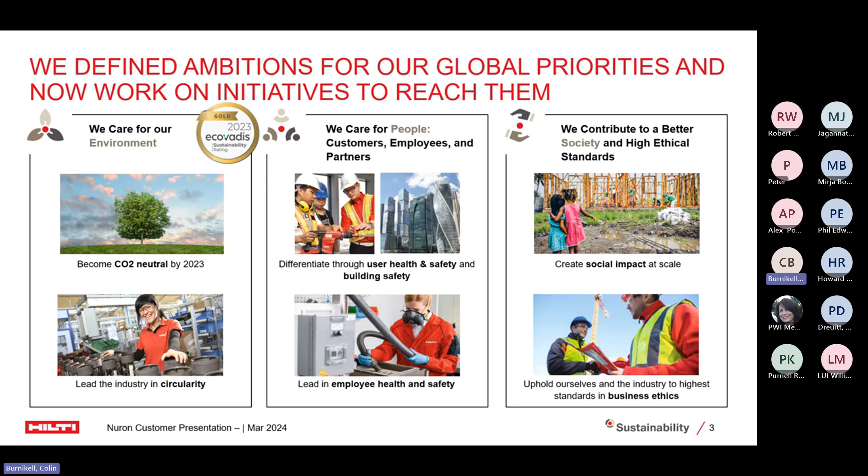But we don't just turn up with a table with a few bits and pieces on it. We like to demonstrate, or better still, get the client on the end of the tool to try it, to see how easy it is themselves.

Now, I can tell you how great Hilti are, but what about some referrals from within the industry? So every summer, COVID excepted, there's a 2-day event in Stratford upon Avon called Rail Live. And historically, this was based on big road rail equipment. But over the last 10 years or so, it's evolved to include all plant, including hand tools, the sort of stuff we would get involved with. And over that last 10-year period, I'm pleased to say that Hilti has twice been awarded the Plant Safety Champion Award. So as great as that is, when you think of all the suppliers that Network Rail deals with, to identify Hilti as their plant safety champion, that's quite some accolade.

However, doing a deep dive, why did we get it? Well, one was our innovative approach to problem solving, and again, you'll see some examples of that shortly. But also, the vast majority of the tooling that we supply the industry is cordless, not necessarily battery, but certainly cordless, which obviously negates the requirement of generators, spill kits, jerry can of fuel, and of course the tripping hazards of trailing leads.

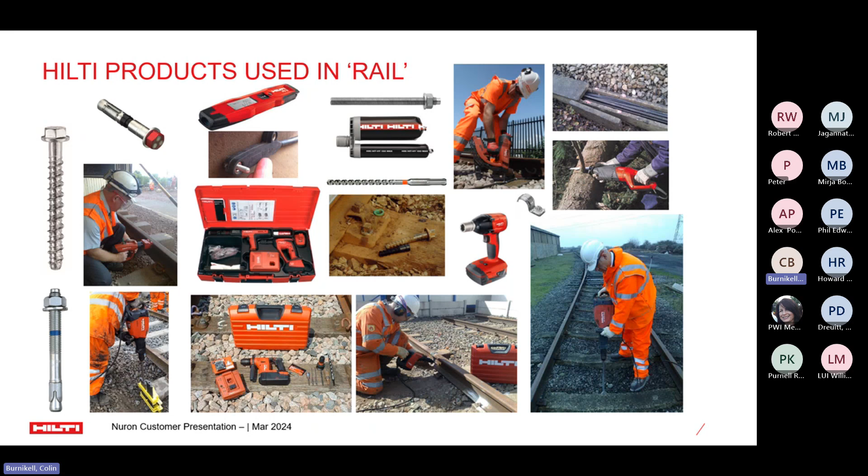So the type of products we supply the rail industry are wide and varied. But any of you on social media would have seen probably about 15 months ago there was a product launch where we introduced the Nuron range, a completely new cordless battery platform that superseded anything else we previously had. Now, the next slide, if everything works correctly, is a short video. There's no dialogue, just a little bit of music, but hopefully you'll get a flavour of what the Hilti cordless Nuron range is all about.

So there you go. That's the Hilti Nuron range.

So there you go, that's the Hilti Nuron range. I know not all those applications are railway related, but it just gives you an overview. I mentioned earlier about this investment in R&D, 50, 60 new products. Well, when we launched Nuron, there was 70 tools on their own in that launch, back in October '22.

So it is one platform. There's 5 different batteries, all with the same connections that can be used on all those tools. The idea is you don't have to mix and match with different manufacturers, one platform does it all. It is just a 22 volt, and for any of you that remember, we used to have a 36 volt platform, that's now been superseded by this. And although it's a 22 volt, it actually gives you a better runtime because of the advances in technology.

Top right, performance, again picking up on that technology piece. We now have the power, in some cases, twice the power of our competitors. So that gives you a longer runtime and gives you all the benefits of perhaps taking less kit out with you. The bottom left, the intelligence and connectivity.

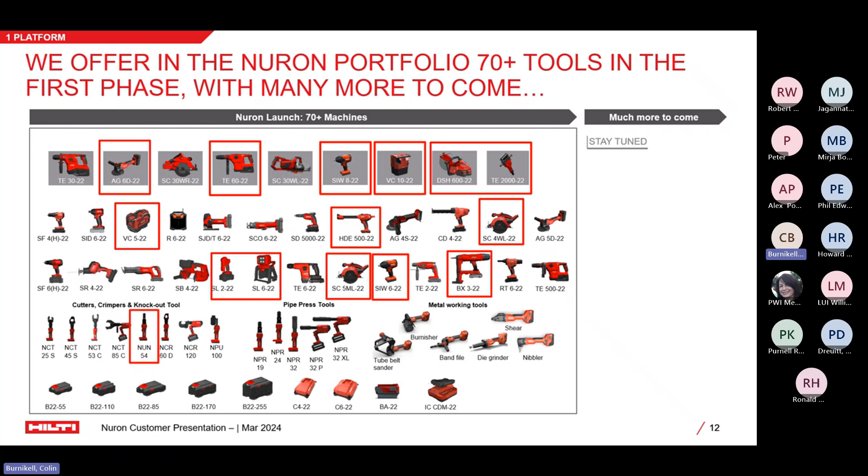In October '22, we had 70 tools. As of today, we now have 120 tools on that platform. I've got another product launch later this month, with another dozen or so tools coming out. The range is expanding, not just the numbers but the type of tools - we now have tower lights, concrete vibrators and mixers. Stuff that wouldn't normally be in the portfolio has been added, and it all uses the same battery platform. So stay tuned.

Here's an indication on those battery platforms. On the left, in the dark grey columns, you've got the old 22 volt Hilti platform and the old Hilti 36 volt platform. With the Nuron 22 volt platform, it clearly outperforms, even though it's less voltage. For the bigger tools, like the cut-off saw and the breaker, they use 2 batteries and you get twice the output. For a cut-off saw, the battery equivalent is slightly lighter, and runtime-wise, with 2 batteries in it and 2 as backup, is comparable to a tank of fuel.

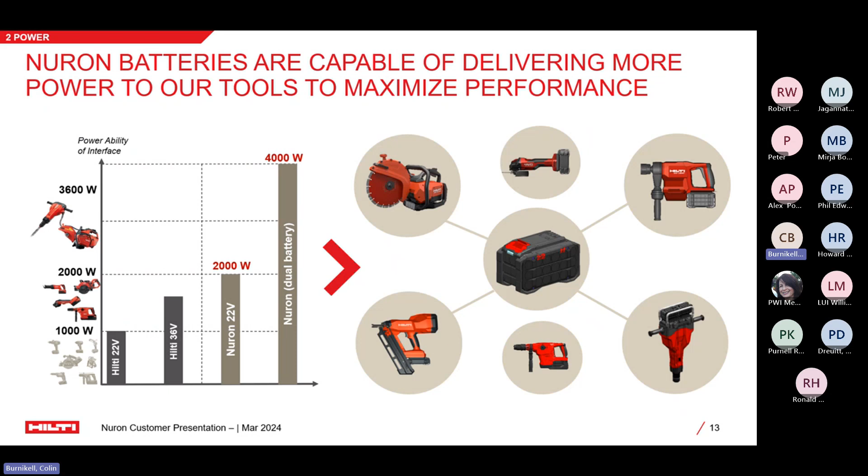On the intelligence and connectivity, or data-driven details, as I alluded to earlier, when you charge the battery, information goes up to the cloud. That can give you all sorts of information should you need it - the last 10 tools the battery was used on, and a last charged location, although not down to a millimetre, more within a few metres or so.

We also have battery health monitoring. There are two ways of doing this. One, you can do diagnostics yourself - press the button on the battery and it does a self-diagnostic. It runs for about 15 seconds and gives a traffic light, red or green. If it's green, the battery's fine. If it's red and the battery is less than 2 years old, reach out to my colleagues in customer services, quote the serial number, and they'll organise a replacement free of charge.

Now, if you go for our fleet option, this lease deal I mentioned, we'll proactively reach out to you. When your batteries are being charged, if we see they're dropping below a performance level we'd expect, we will proactively reach out and say, Mr Customer, battery serial number 12345 isn't running at its optimum. We'd like to collect that, remove it from your database, and supply you a new one free of charge.

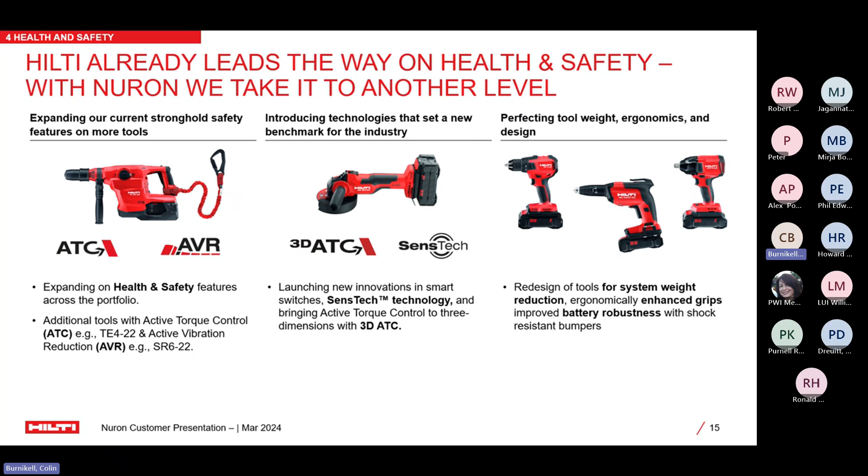So that's some clever stuff with the grinders. On the right, the tools are well balanced and very ergonomic, and as we said before, all the batteries fit on all of the tools. The last piece is dust extraction, which leads on to something in a second.

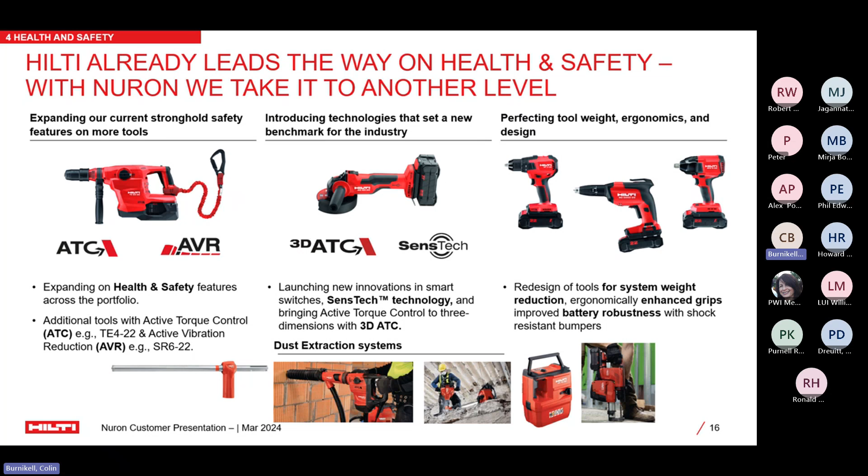On the far left hand side, although it may not look like it, that's actually a drill bit. It has a standard industry connection end on the right and a Hilti cutting edge on the left, but there's no helix - this is a hollow drill bit. The red shroud coming off it lets you plug in a hose to your battery vacuum cleaner, and as you drill into brickwork or concrete, the dust is sucked through the middle of the drill bit, through the hose, into the vacuum cleaner for you to dispose of later.

What about if you've got water ingress above where you're working? Clearly the hollow drill bit will potentially clog and not be suitable. So the middle image shows the drill with a rubber elephant's nose, as it's known in the trade, that simply concertinas up. You have a traditional helix drill bit, and the hose goes away again to your vacuum cleaner, but as you drill, it's not dust that's taken away - it may be a slurry or paste that's taken away.

The next one along is the breaker, which was in the video - our 20 kilo breaker with sub 4 meters per second squared vibration and the ability to operate dustless. And on the far right along the bottom is our TE6 with the dust extraction that won the award, which I mentioned on one of my previous slides.

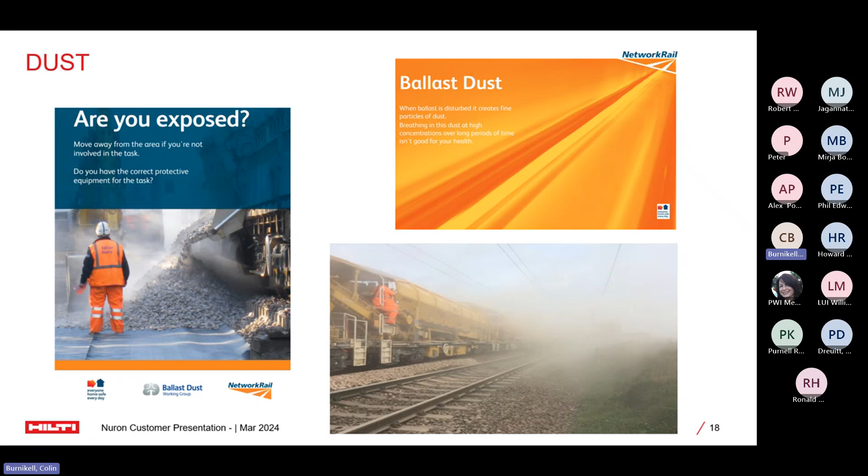But let's look at some applications specifically within a rail environment, where Hilti have come up with a solution partnering with the industry. So dust - when we talk about dust within the industry, it's normally ballast dust, but that's not what I'm referring to. I'm talking about the dust created when you're drilling, breaking, cutting, coring, etc. For those who saw the flyer I circulated, you'll know dust is a bad thing. It doesn't matter if you have the appropriate PPE on, if it finds its way into your ears or your hair. If you can stop it at source, that's by far the best solution.

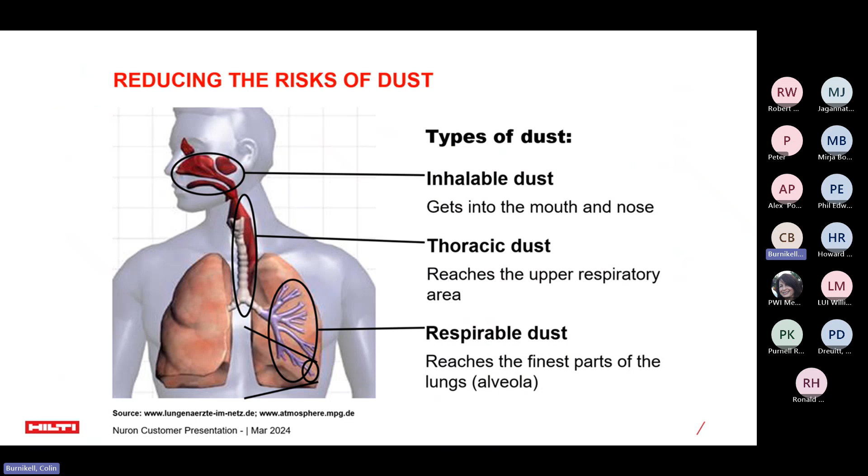What are the benefits? Well, clearly from a health and safety point of view for the operative, he's in a far better place. Interesting to note, the tools remain or become more efficient because the vents aren't getting clogged up with dust, and the consumables become more efficient because you're taking the dust away, whether you're drilling, chiseling, cutting, grinding, etc. That enables you to do the task even quicker.

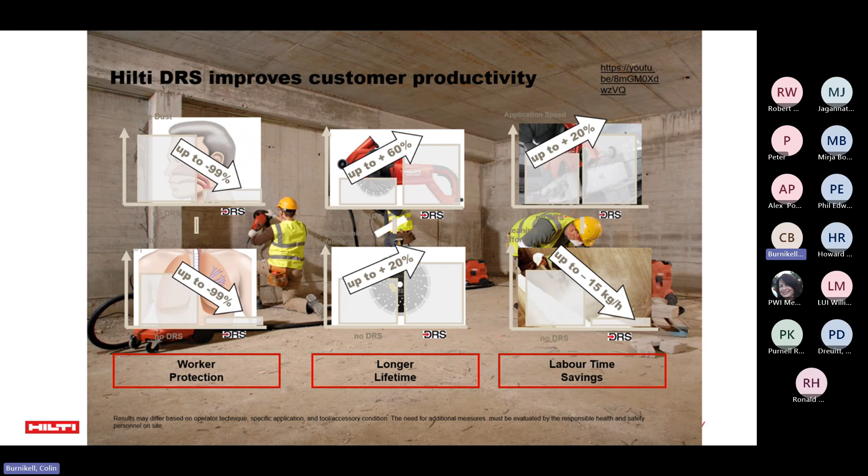So it gives you the full suite. It gives you health and safety benefits to the operative. And don't forget, it's not just the operative, it's the staff who are working around him. It enables you to do the task safer and quicker, and therefore providing productivity gains.

And that led into the slide that I used for the flyer for today's meeting. So that's myself with the battery vacuum cleaner attached to a backpack, so you can literally wear it on your back. Instead of dragging a vacuum cleaner along on wheels, bouncing along the track or whatever it is, you can wear it. And then you have the hose going into the hollow drill bit.

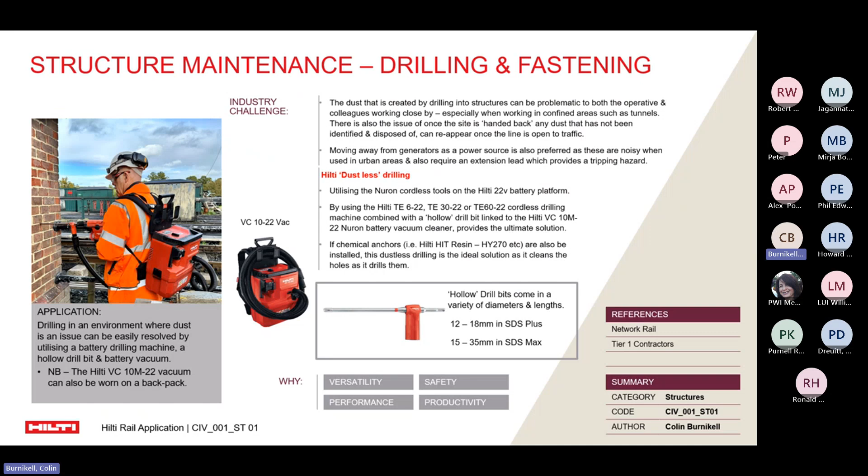And then I have a battery drill with a battery vacuum cleaner, so I'm completely portable. I can do that task anywhere. The hollow drill bits come in a variety of diameters and lengths, and we do the more common SDS Plus and SDS Max connection ends.

Let's have a look at some other applications where we've become involved and come up with a solution. So, Pandrol clip removal - we're talking about 401s predominantly, and you often see people removing these with a keying hammer, rightly or wrongly.

And when they're under tension, when they come out, they're a bit like a missile. They can fly. The recourse of that is obviously colleagues working in and around you can be struck on the leg, or this poor chap got struck on the face. It's not good, so you're looking for a controlled solution.

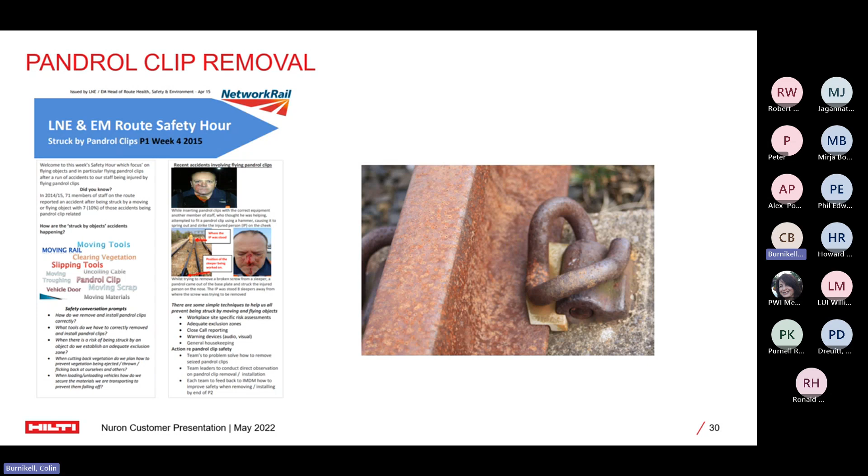So the Network Rail health and safety guys approached me and said, come on Colin, what can we come up with? So this is the solution we have in our portfolio - it's the Hilti TE 1000, and we developed an insert which hooks round the 401.

Now, I hasten to add at this point, it's not suitable for fast clip and it won't work on an e-clip. But for 401s, which are the most common, it literally hooks round the key and it eases it out - it doesn't fire it out. So let me just show you this.

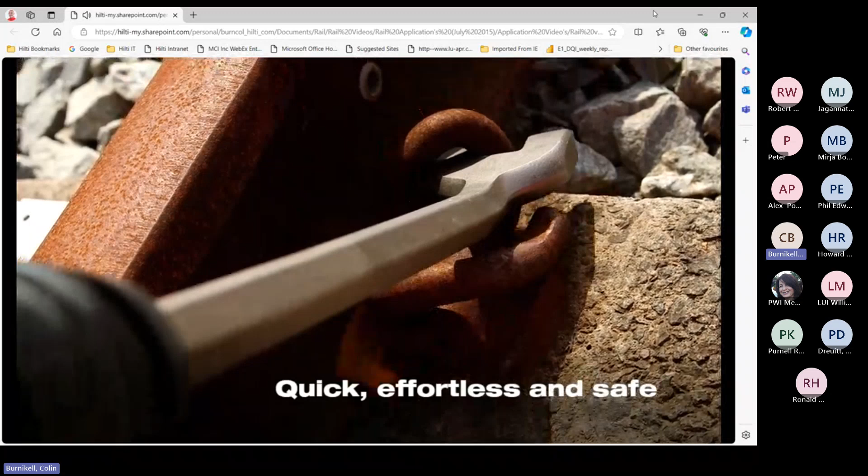So that's the Hilti TE 1000 being used to remove seized Pandrol clips. And we've done this on various locations - tunnels, bridges, level crossings - and it's certainly been a far more effective solution than big hammers, etc.

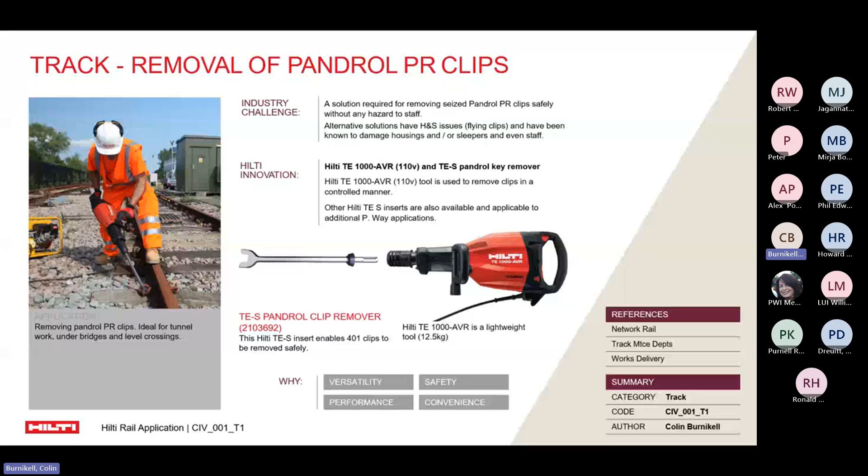But that's fine. What happens if the clip has broken and you need some sort of drift to remove it out of the housing so you can put a new clip in its place? So we've come up with that as well.

So I know the image is showing a complete clip, but if you can imagine that clip has been damaged and it's just the nugget, if you like, in the housing. We have this drift which fits in the same tool, and then all you do, you just ease the billet out, and then obviously you can then put your new clip back in.

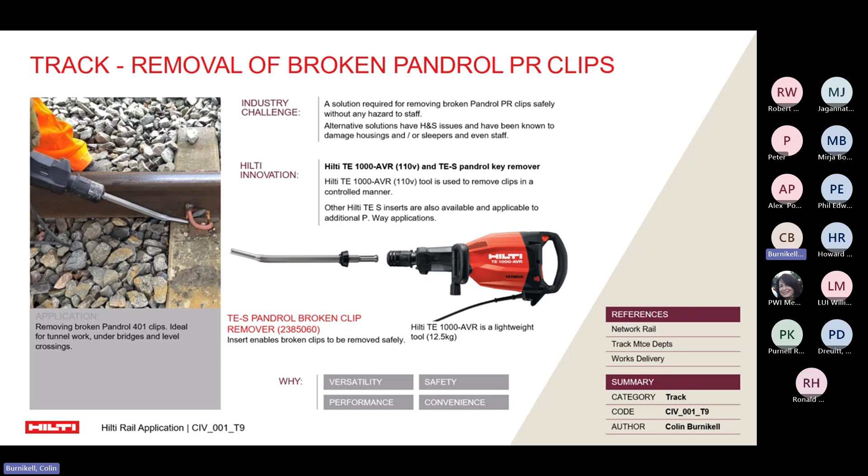I got approached by the Track Safety Alliance about an application for the installation of lateral end restraint plates, and they redeveloped the LERPs, and they wanted a solution for installing it on the sleeper ends and in the 4 foot. So they tried petrol tools that were probably overpowerful when I was bouncing all over the top. They tried big hammers, didn't want to be doing that.

So they reached out to me because the T1000 is Network Rail approved. Can we come up with a special chisel that would mirror the shape of the insert on the top of that blade?

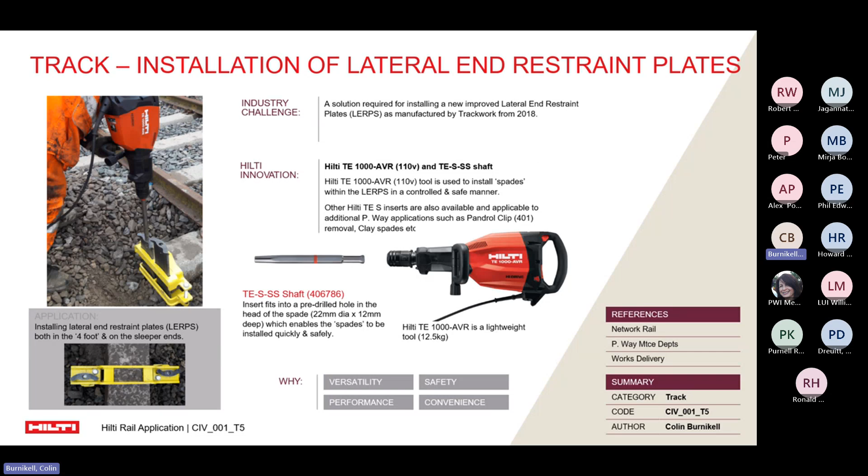So we got together, we had a look at the application, and I said, well, if we have to develop from a standing start a new chisel to support this particular application, there's going to be manufacturing costs and manufacturing times. Why not drill a 22mm hole, 12mm deep, in the head of the blade, and then our standard TE-S shaft will fit straight into that, and you literally just drive it straight down into the track. So you still need to dig it out, but you're using off-the-shelf proprietary items, and that's what they've been doing.

You remember the T2000, what we spoke about earlier on the video, the new battery Nuron tool? Well, it can also be used for installing the LERPs. Same application, obviously cordless, no generators, no trailing leads. It's got more power, more punch, if you will, so it enables you to do the task even quicker.

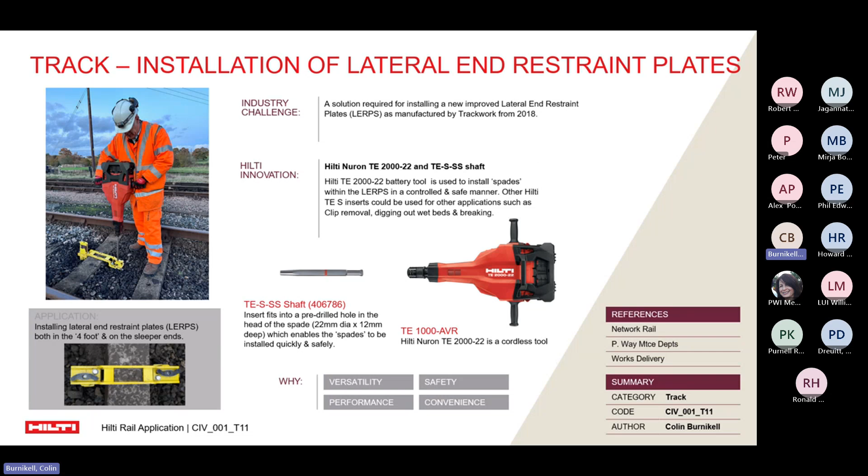And whilst we're talking about PWI and innovation, I'll just share this with you. So cutting rail - I'm not talking flame cutting, I'm talking about cutting rail using a traditional petrol saw. First off, we don't have a saw for cutting rail. News alert, not yet, we're working on it. But what we do have is a traditional carborundum disc, which is very much similar to the standard blades on the market. You'll get 1 or 2 cuts, then that's it.

But we also have a 14-inch diamond blade specifically designed for cutting metal. And the advantages of this are clear. Multiple cuts - it doesn't matter if it's out there and raining, the blade will still perform. Doesn't matter if it gets wet. If you hit a bit of ballast, it's not going to shatter.

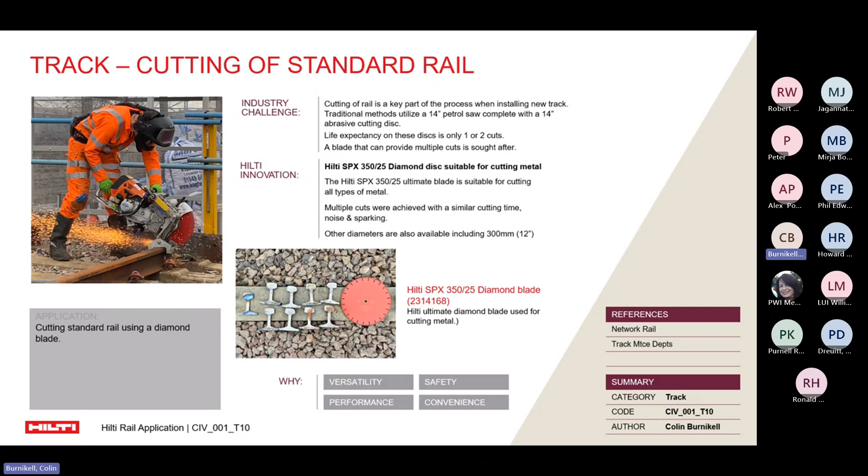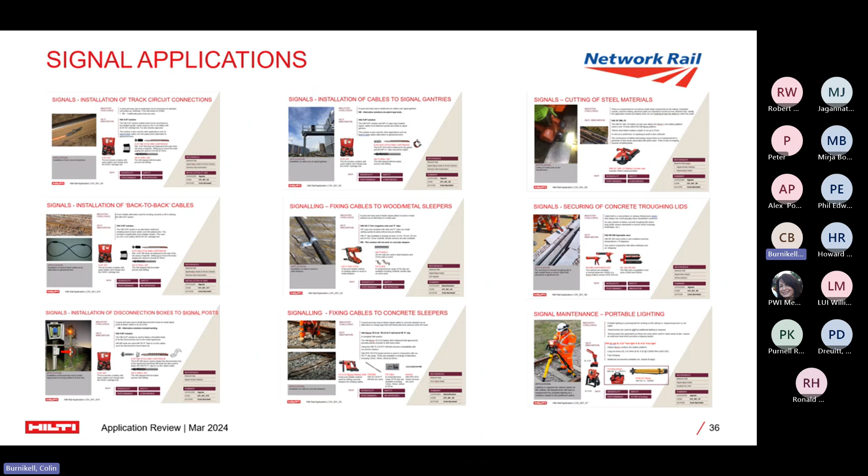Now, obviously, we're a broad church within the PWI, and it's not just about permanent way. So I wanted to share with you just 1 or 2 applications where we've been supporting the signalling fraternity, just to give you an idea of the innovation that we're bringing to the table.

So here is our solution to the track circuit application. Now, we were approached by the industry - Hilti is a recognised supplier for fixing and fastening solutions. How would you install a track circuit? So we said, well, how would you currently do it? Normally a petrol tool clamped over the top, etc. So we came up with this solution. Instead of me verbalizing it, let me just play this video and hopefully you'll see what I mean.

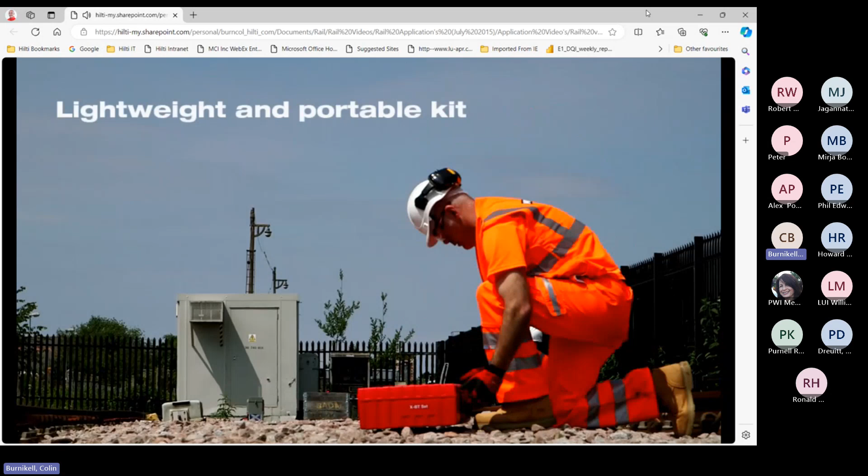So everything's supplied in one kit, in one box. You have a cartridge tool, a drill, a couple of batteries, a charger, and a recess for all the consumables.

So we do 3 different jigs for the most popular rail profiles, and they're magnetic, so they simply sit in the web of the rail. Now what we're going to do is mark the 2 holes in the rail at the correctly spaced 76mm centres.

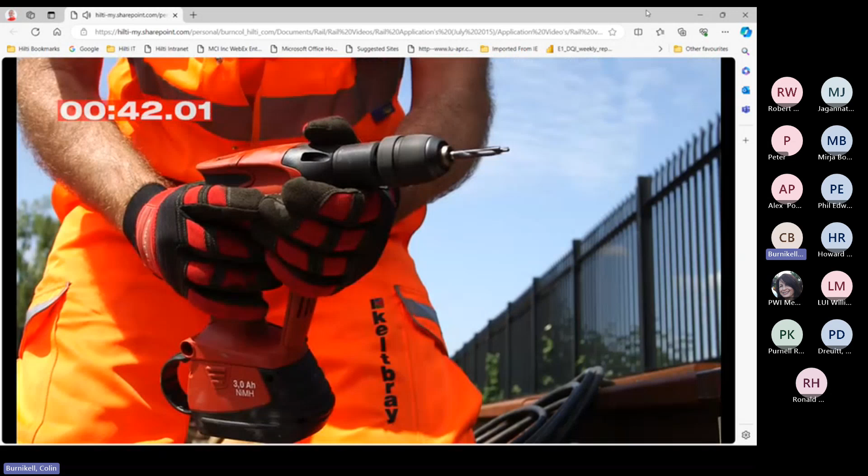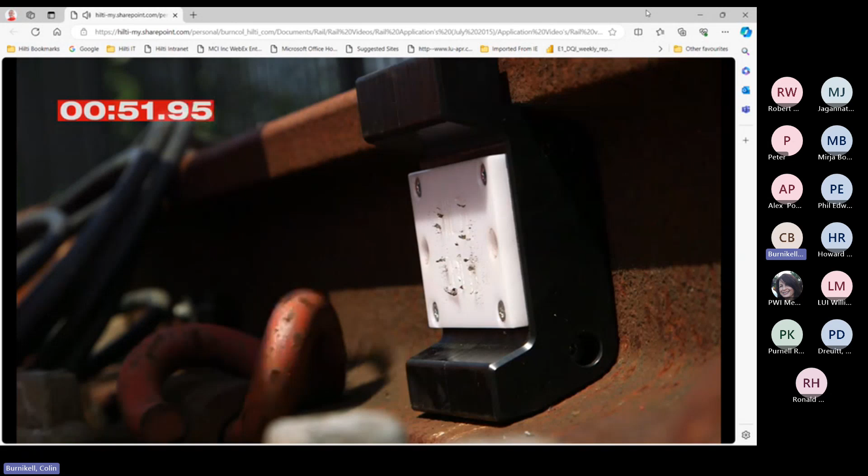So there we've marked the 2 holes. We're now going to go back and finish drilling. It's a shoulder drill bit, so you're not drilling all the way through the rail, we're just drilling 7mm deep, 4.2 diameter. So the drilling time using a battery tool can obviously be done very, very quickly.

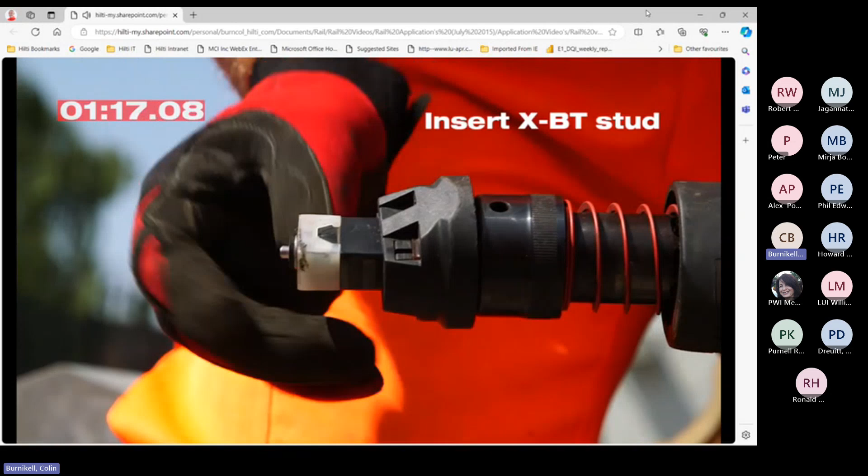And then we have a cartridge tool. By definition, the power source is a strip of cartridges, and we have a threaded stud - in this case an M6 - that sits in the front, but notice it sticks out. And then all we're going to do is line it up in the hole, pull the trigger, and the stud is an interference fit in that blank hole.

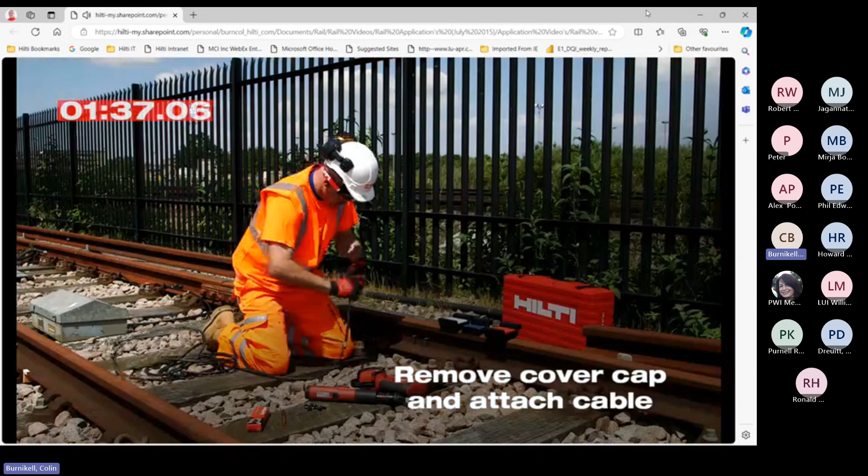We then remove the protective caps off the threaded stud to expose the M6 stainless rod, attach the track circuit, put your stay tight nuts and torque to 10Nm as you would. So it's quick, easy, portable, and industry approved.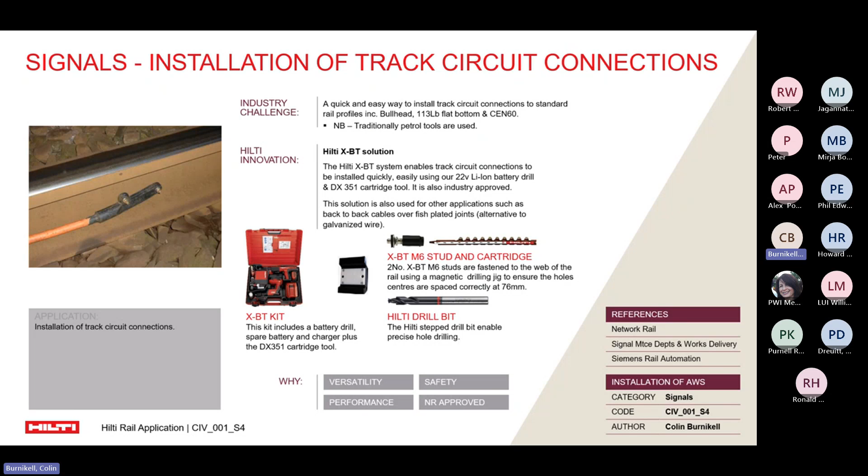Now what's interesting with that application, we've had that for some time, but both NR and the signalling contractors like Siemens, Atkins, etc., have become quite creative, using the same kit, the same tools, the same drill bits, same studs, as an alternative to a galvanised wire on a fish-plated joint. We don't make the back-to-back cable, but it's the same manufacturer that makes the track circuit, so it has the same hole geometry, which enables us to use the same stud. This will give you far better reliability as opposed to a galvanized wire.

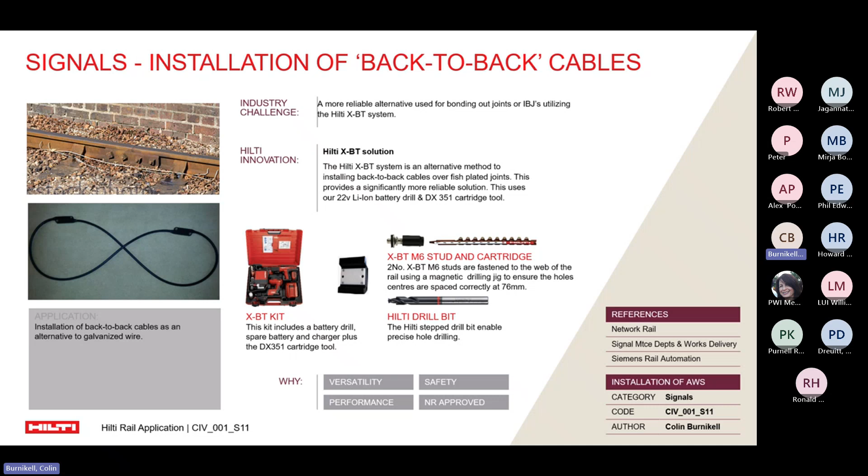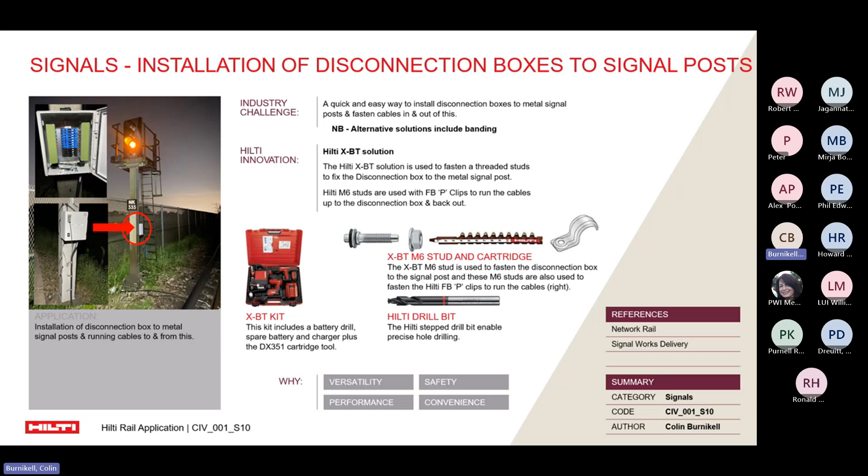Disconnection boxes. So when these are fastened to a steel signal post, what the guys and girls have been doing is putting one stud at the back of the disconnection box. You've got a hole at the 6 o'clock and the 12 o'clock positions, so they put one stud on each, with nut and washer, then run a cable away from the disconnection box and another cable up to it. They use another M6 stud and one of our P-clips just to hold the clip in place.

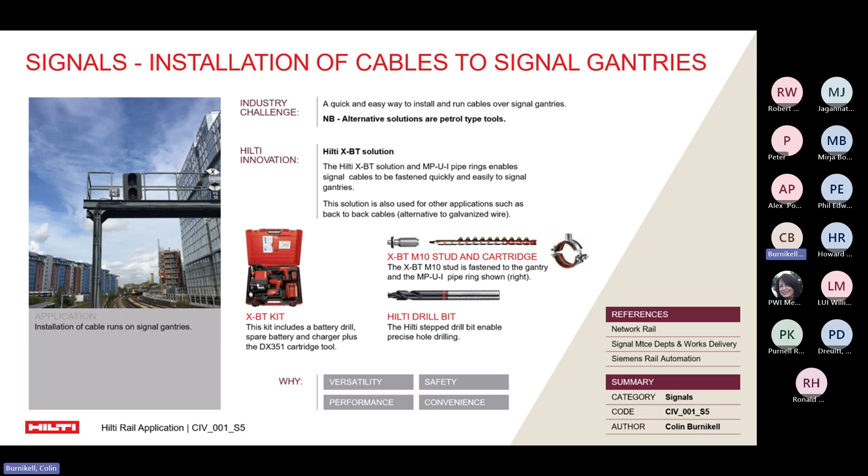And then the other one was running cables up a signal gantry. In this instance it's the same kit, the same drill bit, but we've gone for a bigger M10 stud, which enables us to use our clips with an M10 boss. You simply spin that on, attach the cable, and it gives you a nice, tidy, safe job.

The more traditional method for fixing cables to concrete sleepers is cleating. So we have the Nuron battery drill, which we spoke about earlier, NR approved. We have the 6mm drill bit, and the hammer screw and P-clip, industry standard. This has been done for some time.

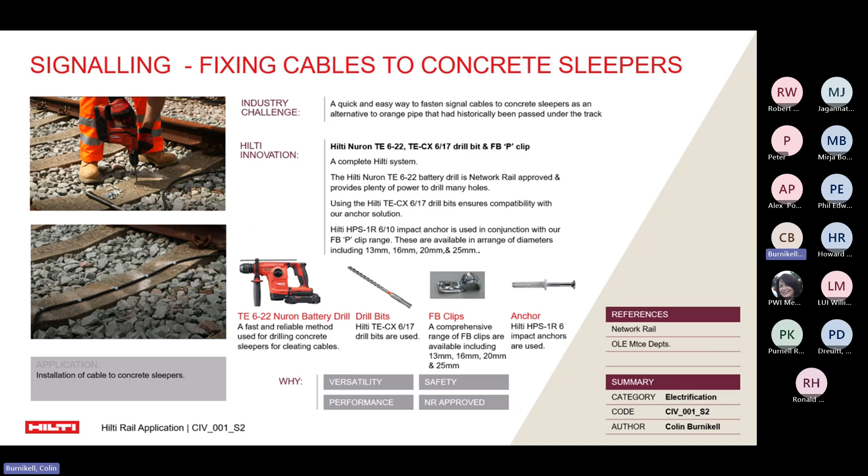But what about if you want to fasten to wood or steel sleepers? We have a network rail approved solution for this. I'll just run this video and you'll see how that works.

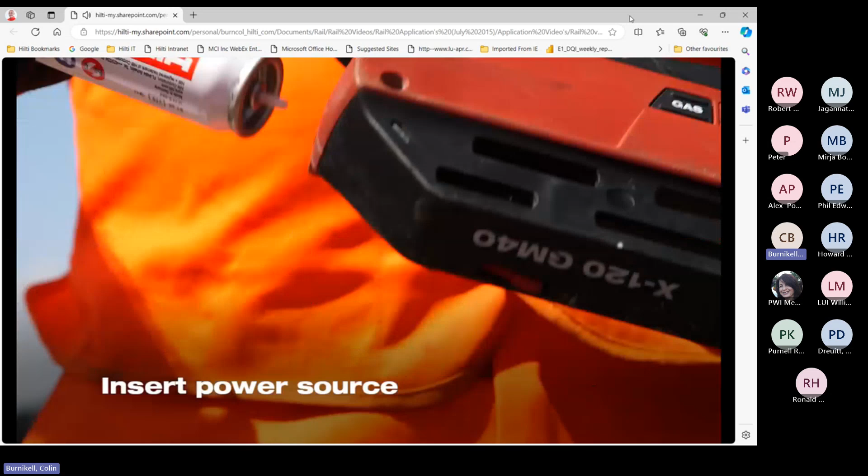So we have that track circuit installed, and now we're going to cleat, in this case, to a wooden sleeper. It could be a steel sleeper if it's north of the river, but the gas goes in as a power source. There's your gauge telling you how much gas you've got, and the nails go in the magazine. You can put up to 40 nails in, and one canister of gas will give you 1,250 fixings.

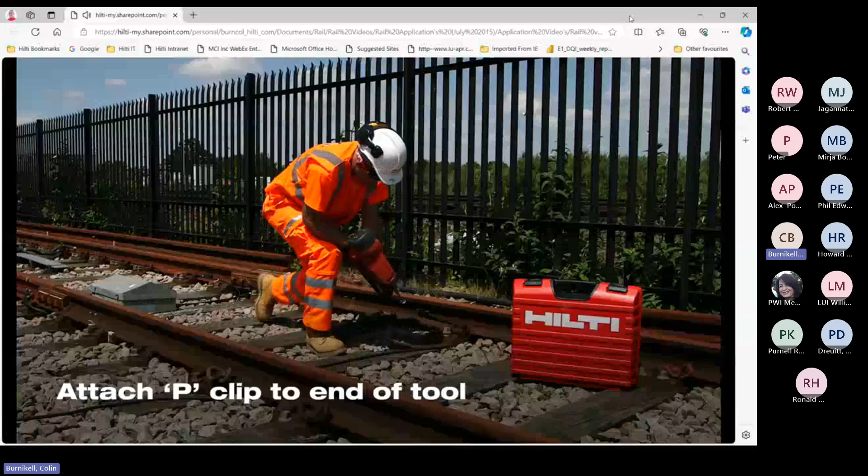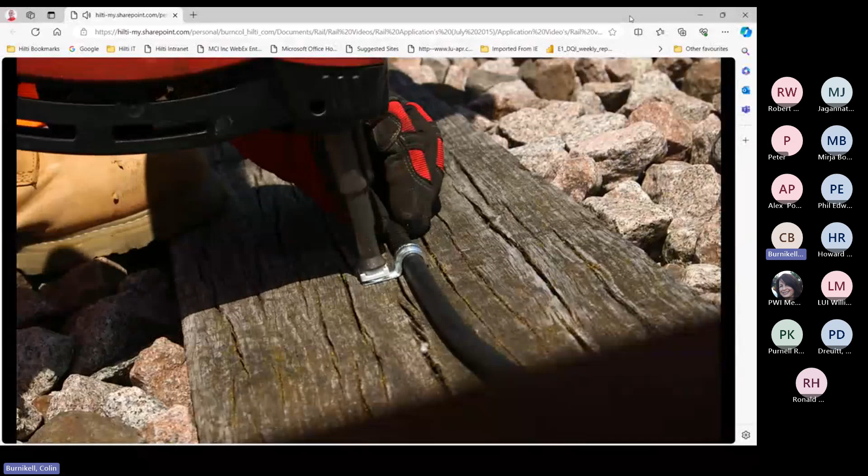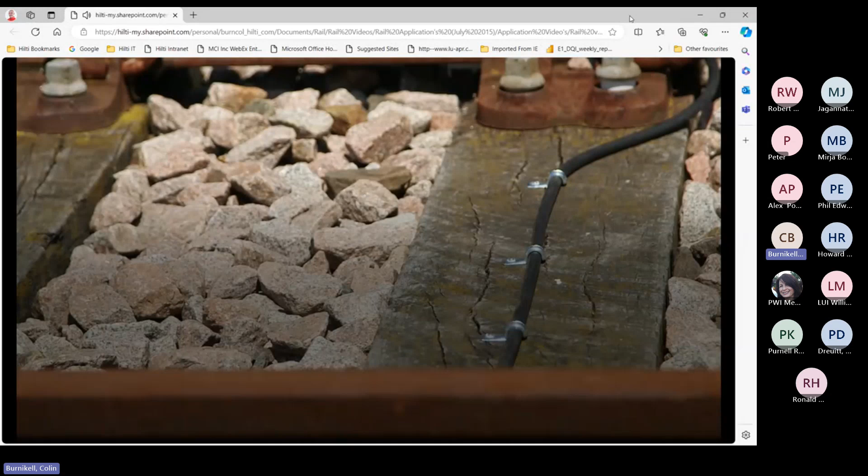P-clips come in different shapes and sizes, but notice that raised dimple - that enables it to attach to the front of the tool. You simply push down, pull the trigger, no drilling - it just fires the nail through the P-clip, in this case into your hardwood sleeper, but equally it would work on a steel sleeper. Nice, clean, tidy job. That solution would also work on GRP sleepers as well.

Just quickly running through some other signaling applications, the Hilti HSL anchor is the industry standard for fixing the AWS bolts, AWS magnets down. This has been upgraded - it's the same diameter, same length, gives you the same load performance, but the torque moment has been reduced, making it easier to set. In the bolt head there's a QR code, so if that AWS magnet was installed and there was an issue with one of the fixings, you could simply scan the bolt head with the Hilti app and it will tell you the part number, the batch number, the description, etc.

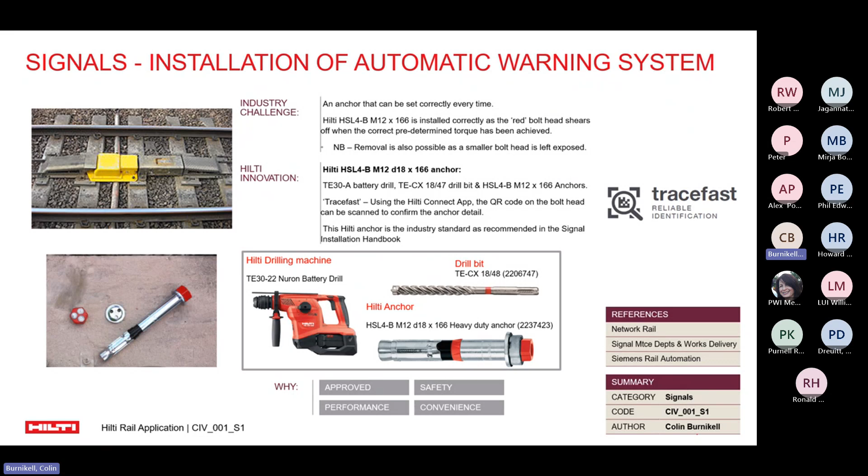Just quickly rattling through these last couple - cutting aluminum plate, channel rodding - we have a circular saw designed for cutting metal. Now normally circular saws, you're thinking kitchen work surfaces, etc., but this one is designed for cutting metal. It's also a cold cut, non-sparking, and capable of collecting the swarf as it cuts. Some very clever stuff there, and it's been well embraced by both maintenance and works delivery within Network Rail.

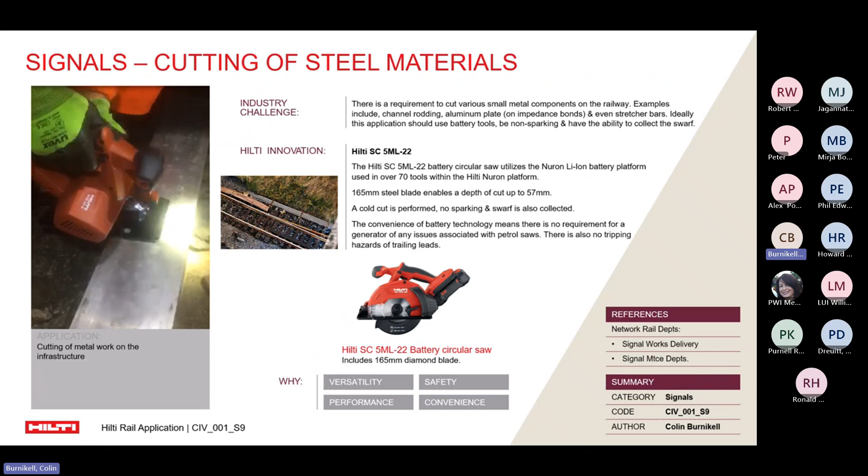And then cable theft is, or certainly was, a bit of an issue. We have a solution where our resin, historically used with our threaded rods, can be used as an adhesive. Literally you line the top of the concrete trough, and then embed the trough lid on top. Over time the resin cures - at 20 degrees it's about 9 hours to fully cure.

So where you have easy access, like level crossings, places where the public can easily get in, and these undesirables may be trying to take cable out, you could put maybe 10 or 12 troughs glued down. Beyond that they'll be open because obviously you need access from a maintenance point of view.

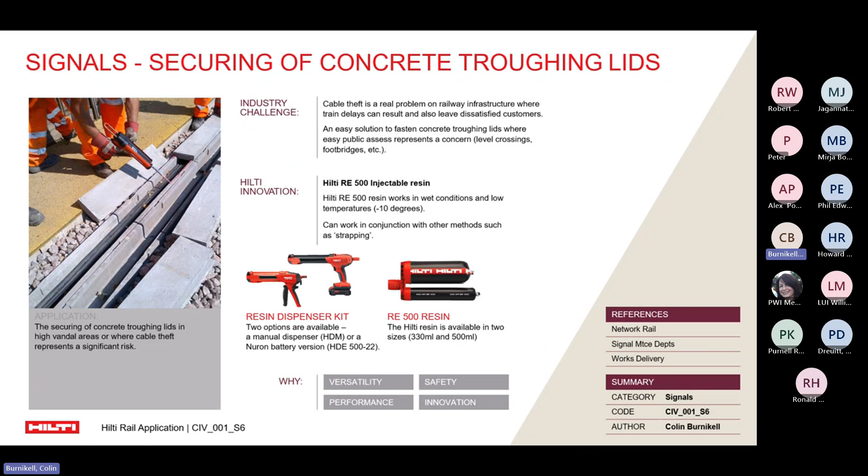On the lighting side of the Nuron platform, we also have lights to complement the head torch: a task light and an area light, and we've recently introduced a tower light. It goes up to 2.1 meters, is 6,500 lumens, with a runtime of about 4.5 hours.

The clever thing with that light is you can isolate either the left or the right side. So if I'm putting that light up to a tunnel wall and only want to illuminate one side of the track, by turning off the other half we avoid light pollution, and I double my battery life because I'm only using half the LEDs.

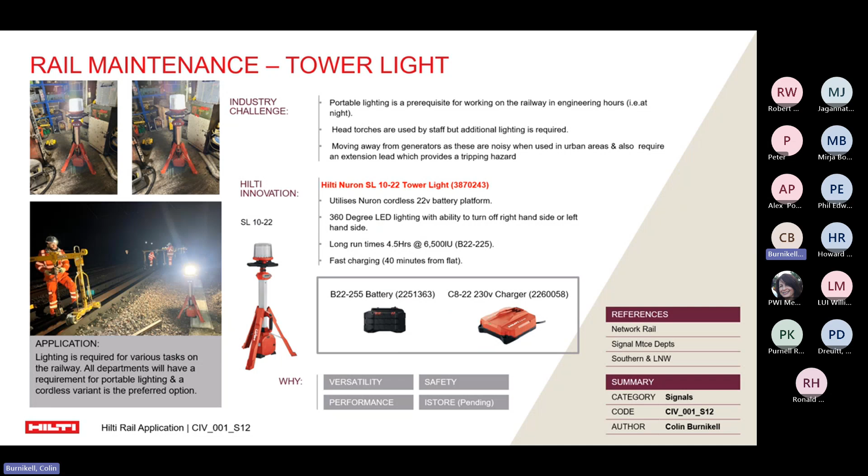So a glimpse into the future - this is new stuff that's coming, not yet available, but coming this year. This is a battery pack. There are a couple of bits of kit in our portfolio that are still 110 volt, and this battery pack would supersede a generator - no noise, no fumes, no rip cords, no spill kits.

It's a battery pack that weighs about 16 kilos. Run time depends on what you plug into it, of course, but charging time from flat is a couple of hours. For the welders who use our needle guns, that would be an ideal bit of kit, and it's maybe 25% of the size and weight.

We've also introduced, or will be introducing this year, an addition to our exoskeleton range. In this example, maybe a little difficult to make out, the chap drilling with that drilling machine has a link above the drill clipped onto the exoskeleton. So all he's doing is guiding the drill - the weight of it is on the exoskeleton.

So if you have heavy, big bits of kit that you're using in that sort of environment, you're not actually physically holding it, you're simply guiding it.

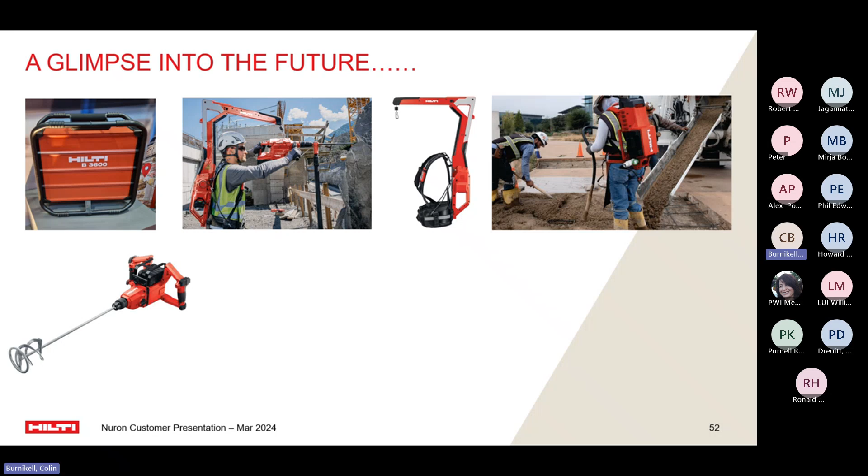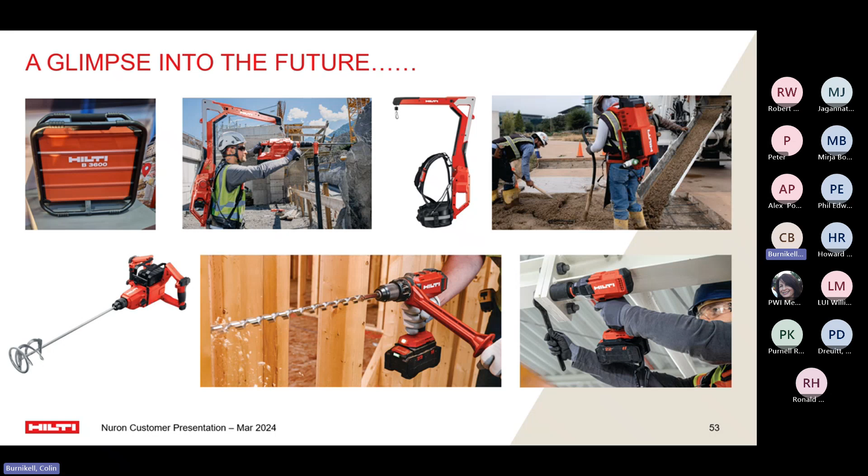We also have these concrete vibrators coming out this month - a backpack version and a smaller one. We also have a mixing paddle, for grout under base plates and that sort of thing, all on the Nuron platform. Then there's a drilling machine, ideal for hardwood sleepers, and an impact wrench coming in August with a 3/4 inch drive, ideal for things like fish plates. All this stuff is coming this year, and it's all Nuron battery operated kit.

So the final piece of my presentation is about our asset management solution. I want to take you on a journey into time. This has been endorsed by Network Rail as an ideal solution for them, and they've invested in this.

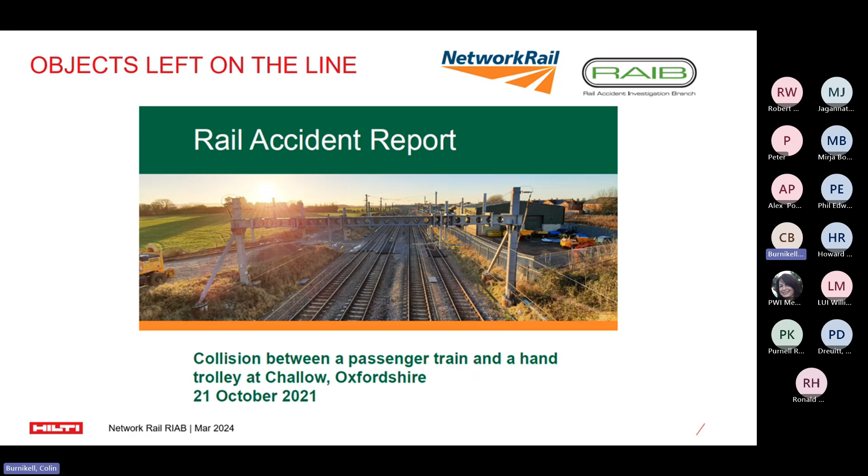Challow, Oxfordshire, October 2021. There was an incident at this location, and suffice to say, the Rail Accident Investigation Branch got involved. Quick geography check - where is it? Challow, Oxfordshire, not far from Didcot.

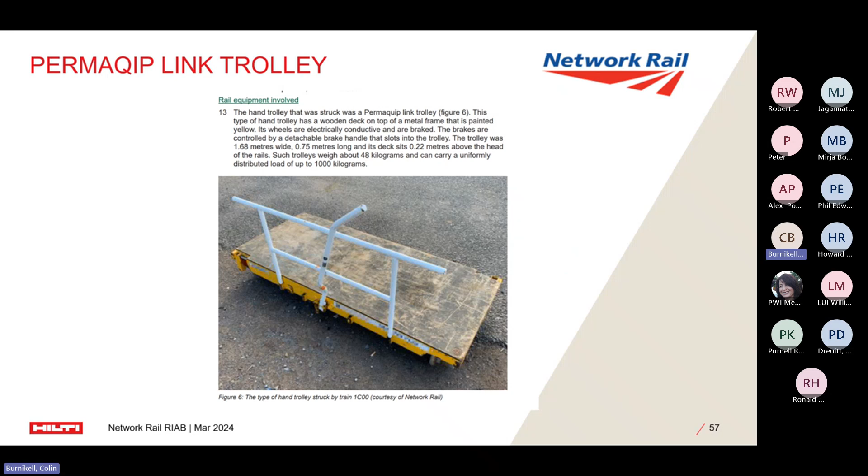Here is a link trolley. Why am I showing you a link trolley? Well, this is what the driver saw when he came down in his Azuma at 123 miles an hour - the link trolley was left on the track.

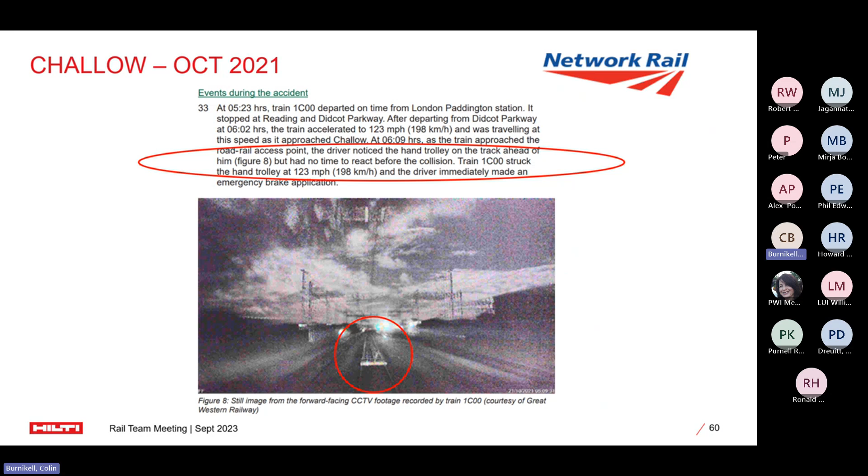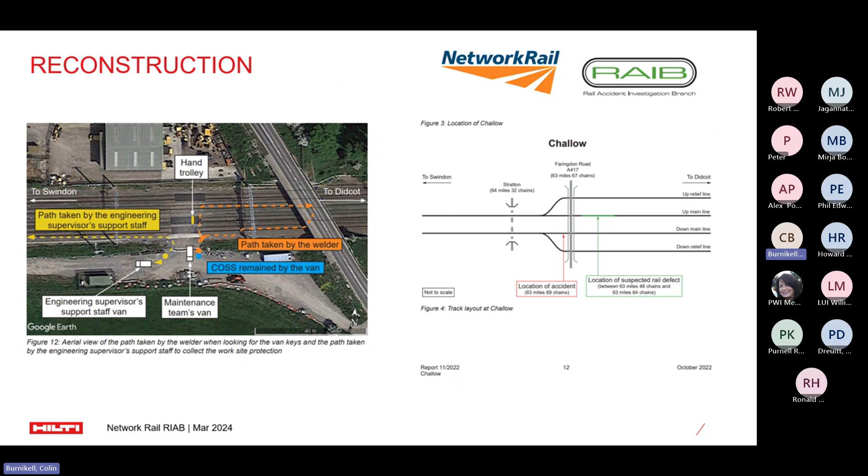The Rail Accident Investigation Branch got involved and decided to do a reconstruction. This is the access point - the vehicle backed up onto the track, and the next slide shows what they did as a reconstruction, offloading everything onto the trolley. The vehicle drove off, the trolley was pushed down to the job site. They then did the task, put everything back on the trolley, brought it back to the access point and loaded it all back. Their conclusion was it was pure and simple human error.

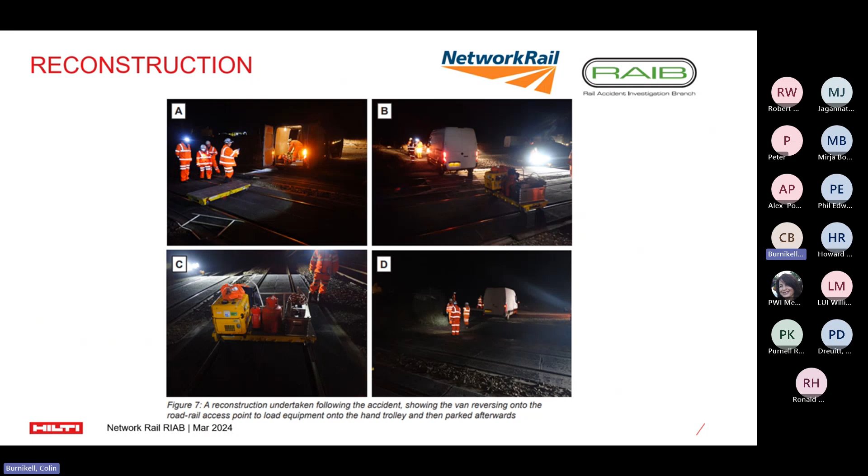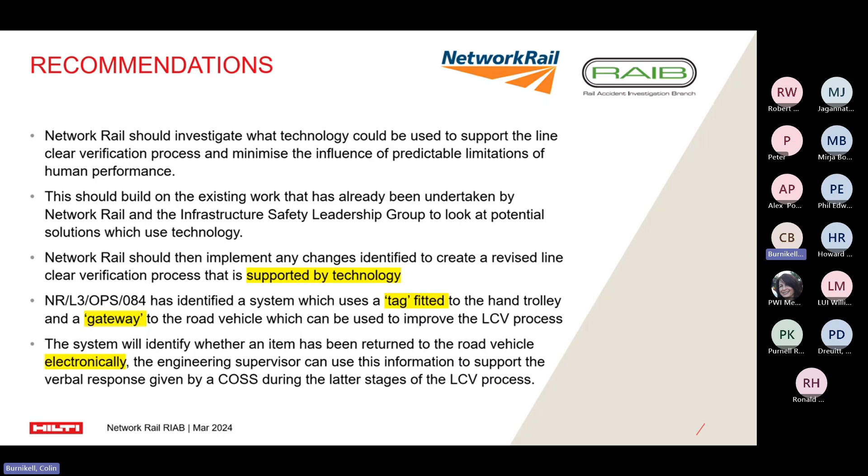However, they made some recommendations. Now, the first thing to point out is we're not going to get involved with the line clear verification process, but with the technology available out there with tags and gateways, this should be something Network Rail would embrace. So that leads on to the Hilti ON!Track asset management solution.

So you know Hilti for tools and fixings, but we also have a range of services, and here is one example of that.

With this system, what we have is an app for your mobile phone that works on all mobile phones, and we also have a desktop version - that's your software. On the hardware side, we have passive tags, like a QR code on an adhesive label that you simply attach to the asset. Now that becomes a manual process.

When I'm taking it out from the stores, I have to physically scan that tag, and then it says it's been taken from the stores. And then when I finish with it, I have to manually scan it back into the stores. With the greatest will in the world, although that was better than pen and paper, there were still some challenges with that.

So we introduced a Bluetooth tag. This tag would typically go either zip tied to an asset. Don't forget, this can be any asset - it doesn't have to be a Hilti tool. It can be an Ironman, link trolley, skate, point machine, whatever. This can be zip tied, or it's actually got a wire here that would hook round, and you would attach that to the asset.

Now here we have an inventory gateway. This will be sitting in the stores. So when the asset with this tag attached to it leaves the stores, it's automatically transferred out the stores. There's no paper to be filled out. It automatically does that. But of course, where has it gone?

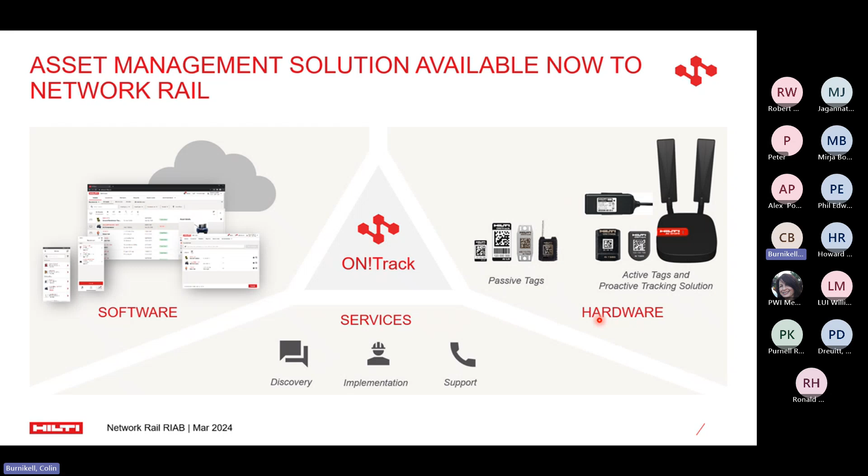So let's just show you this one. Said asset's in the stores, comes out of the stores, automatically booked into this van. The van drives to site. Now, there may be something they're going to transfer it into a store's location on site, or it might simply get used on site. So let's say it gets used on site.

Now, before they hand the track back, that scenario where we had the reconstruction, you simply run an inventory report. And what that will do, it will say, when we got to site, 10 assets come out with a Bluetooth tag on, and 10 have been returned to the vehicle, in which case you could send a copy of that report to the COSS, whoever needs it, saying, yeah, all fine.

But it might say 10 assets were removed, but only 9 returned. It will tell you this is the one that's missing. It will show you a library image of what the thing is that's missing, and because it's Bluetooth, it's sending a signal out. It will show you the last seen location, and it might be 15 minutes ago, and it's just down the track, past that embankment or whatever it is.

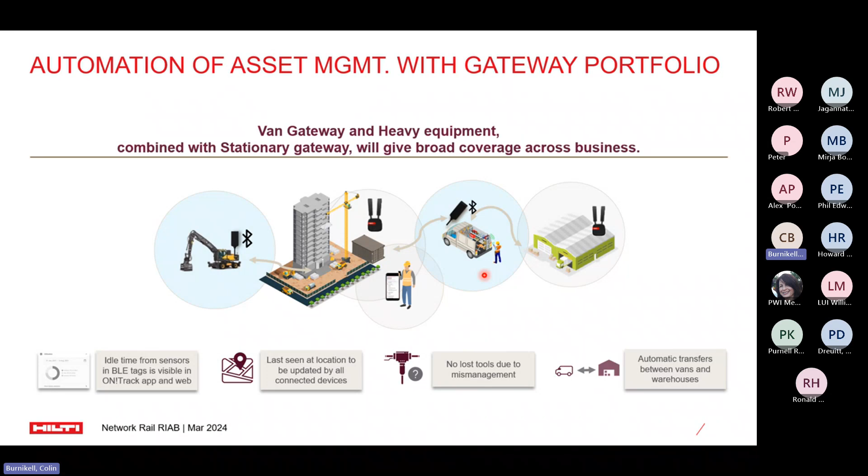So you've got a map. You can zoom in and you can see where it is, and then you can ask one of your colleagues, go and pick it up, bring it back to the van, and then we're clear. So it gives you this accountability, it gives you the visibility, and it gives you the transparency as well.

And then just as a kind of footnote to this, we've spoken about moving and managing assets. We can do inventory checks. So if you wanted every Monday morning at 7 a.m. to have an inventory check in the stores, it would auto run and send that report to whoever needs it.

If you want to create reports, how many repairs have we done in the last 3 months on petrol tools or whatever it is, we can create all these and set them up in the system. And we can also attach any documentation - it might be MOT, insurance, PTS, operators handbooks, whatever. These can be attached.

This thing about asset utilization we spoke about before, you've now got the hard facts in front of you. That set of tools hasn't moved in 6 months. There's the facts, there's the evidence. Let's off-hire it, we don't need it. So yes, it can be used for the assets on the line, but it can be used for a wide range of other things as well.

And just to give you some examples, this was the Network Rail plant location in Scotland. So within plant, it's road rail vehicles as well as hand tools. So what they done on these vehicles, they put our QR code on the driver's door. So before the driver got in the vehicle, he'd simply scan the code. It brings up a picture of the image, and it will give him all the additional information he might need. And if there's any certification, it won't just give the date, it will give you a copy, PDF, that you can open up if requested and produce.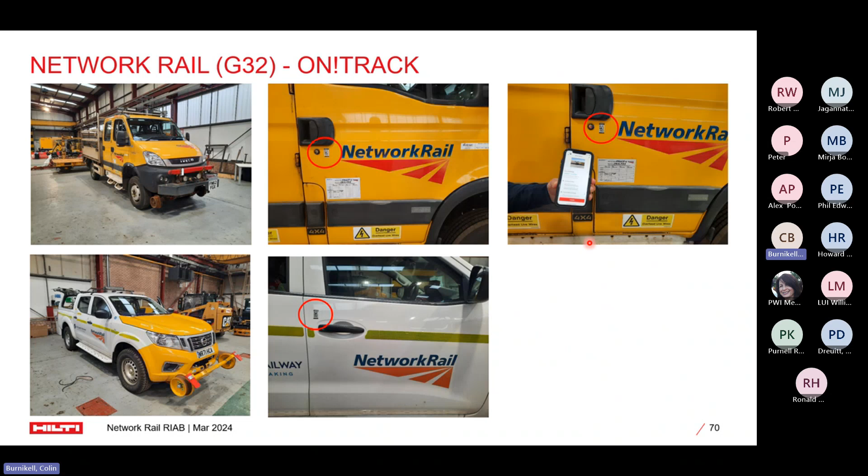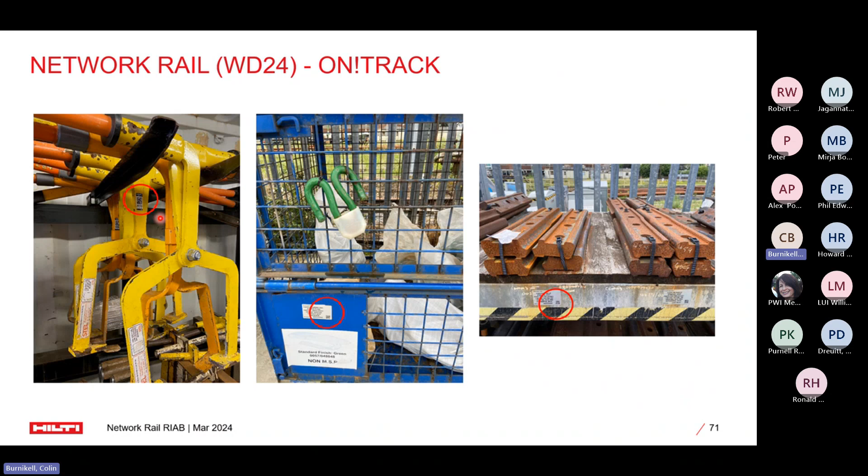With regard to PWI consumables: pairs of fish plates with QR codes, bags of fast clips with QR codes, nips with QR codes, and then also Ironman, which has a Bluetooth tag.

You'll notice none of those assets I've just shown you are Hilti related. With all these assets, you'll have multiples of the same thing. So each one, Ironman as an example, will have a unique asset number, and also a unique QR code number on the Bluetooth tag.

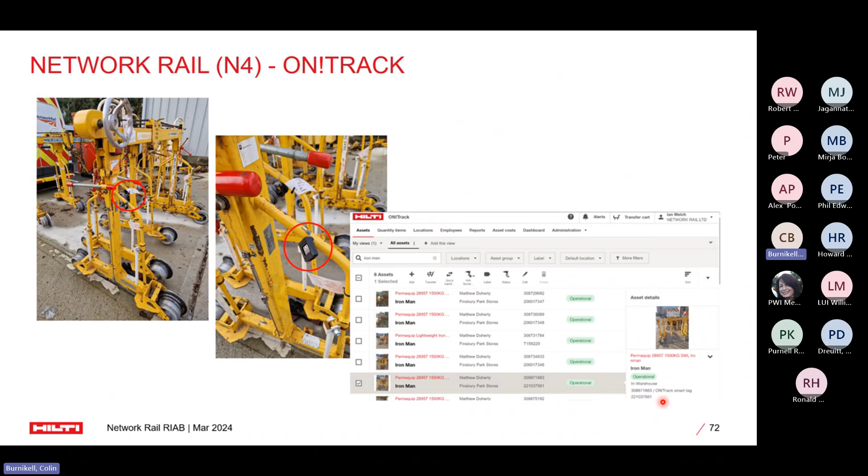So you can do a deep dive - yep, that's the one I'm looking for. It brings up an image, and gives you information like when it's in date, when the next service is due, etc.

This is the last slide for you - just some topics of conversation to get the grey matter thinking. I'm not looking for direct answers, but with the kit you have in your inventory, how reliable is it? If you're hiring in kit, is it the latest generation? Is it being serviced? And from a managing of assets perspective, where are those assets, who's got them, how much time do you spend trying to find them?

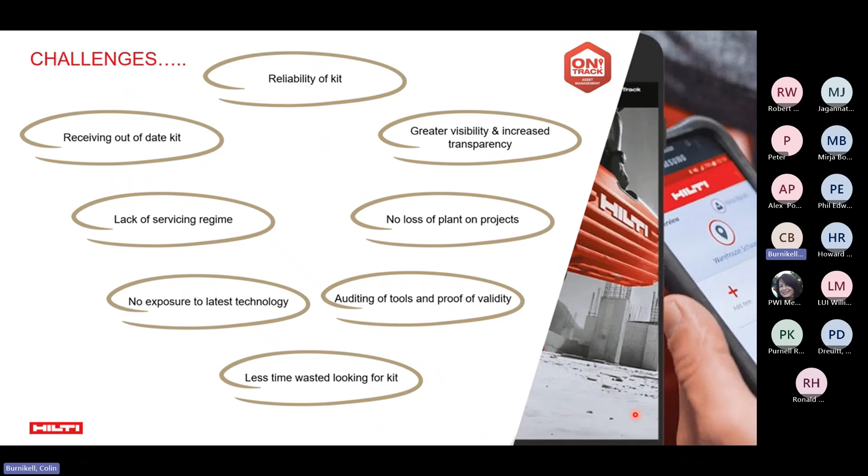The beauty of this system is it's obviously visible, because if it goes out of the stores, it automatically logs it out. It gets in that van, and we automatically know the welding team or the PWI team has got it. So you get that accountability and visibility.

So that concludes the presentation. There's three sort of areas - we spoke about Nuron, we spoke about specific applications where Hilti has supported the rail industry, and then we've gone into asset management. So hopefully that's given you a bit of a flavour. As I said in my introduction, it's a little bit different being a partner to the rail industry rather than a supplier. Thank you.

That was great, thanks very much, Colin. Yeah, over to you, Peter.

Thank you, that was an excellent presentation. Just a quick shout out to those people logged on watching - if you have any questions, now's your chance to dive in. Give me a wavy hand if you've got something to ask.

In the meantime, a really fantastic presentation that was quite captivating, actually, Colin. It was lovely to hear about the environmental credentials being recognised with gold awards - that's always a positive thing. Lovely to hear about the capabilities of the Nuron equipment and the breadth of the range you have to satisfy many needs.